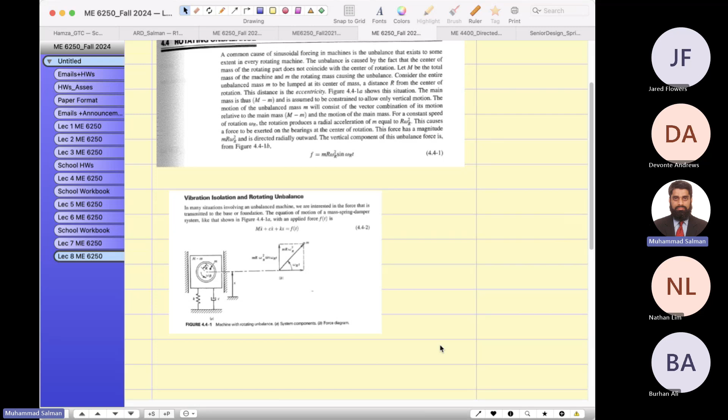So today we are going to cover the last topic of this chapter: vibration isolation and rotating unbalance. There is a very good example in our household, like a laundry machine or washer.

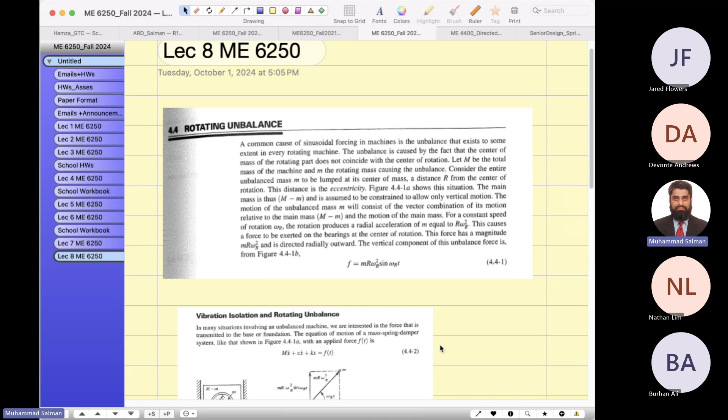So you see a drum. If I share with you, so what happens? You see, it's just like the washer here, which has a mass m.

So the mass of the washer is big M, and the mass of the rotating drum is small m. This mass has a radius we call the eccentricity. So the distance r from the center of rotation to the unbalanced mass is known as eccentricity, represented by the letter R.

And omega R is the constant rotation of that drum, or the rotating mass inside the machine. So when this mass rotates, the machine starts moving up and down, or vibrating with the rotation.

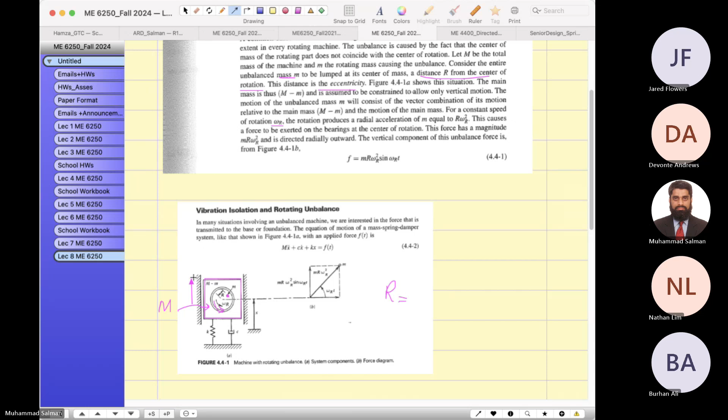And as you know, there's force transmissibility, the force due to this mass. Do you remember force equals mass times acceleration? Everybody knows this equation, correct? So what is the centripetal acceleration?

If there is a rotating mass, omega sub r, this is r. Centripetal acceleration is also known as v squared over r, where v is the tangential speed, which can be written in terms of omega as big R omega. V equals big R omega.

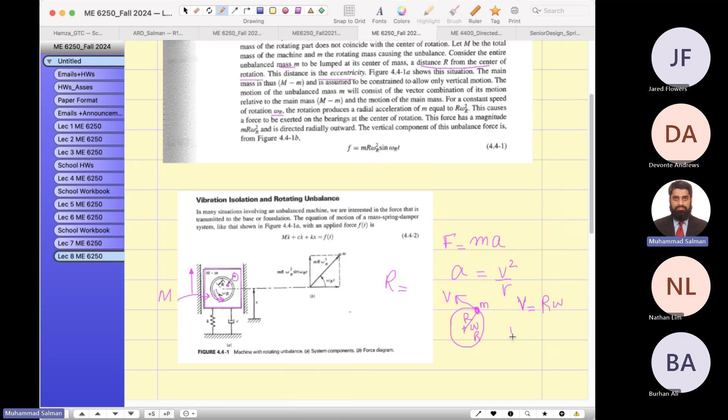And if you take the square of this, you get R squared omega squared, and you can plug it in — I'll just put this as big R. So the normal or centripetal acceleration is v squared over r, which is R squared omega squared divided by R. Now we know the force due to this unbalanced mass can be written as mass times acceleration, giving mR omega squared.

So this is the unbalanced force. Let me grab this one — the force transmitted to the foundation can be written as this equation.

When this machine moves, the mass moves like a washer, and the machine starts vibrating with a degree of freedom x, and this vibration also starts moving the foundation with a certain amplitude. I'm concerned more about the force transmitted through the spring, which is k times x. So this is the transmitted force to the foundation due to the rotating unbalance.

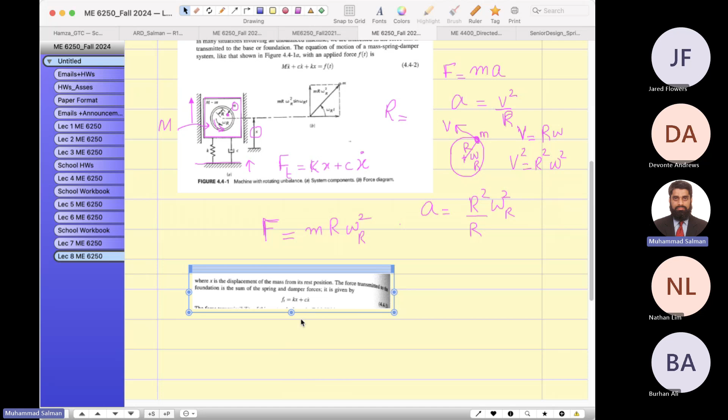Some people notice that if you have a washer on the second floor, when the machine completes the last cycle of laundry, it vibrates very fast, and that vibration can be felt in the floor. If you feel that, it's going to the foundation — how much of that vibration is transmitted from the rotating mass?

So this is Ft over F, also known as T sub F, where Ft is the transmitted force to the foundation. And what is that formula equal to?

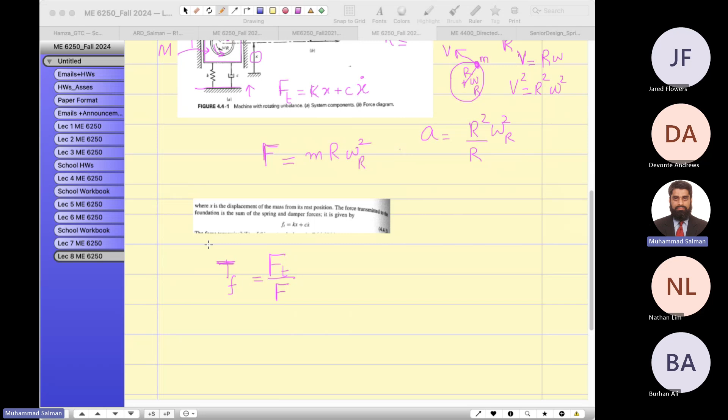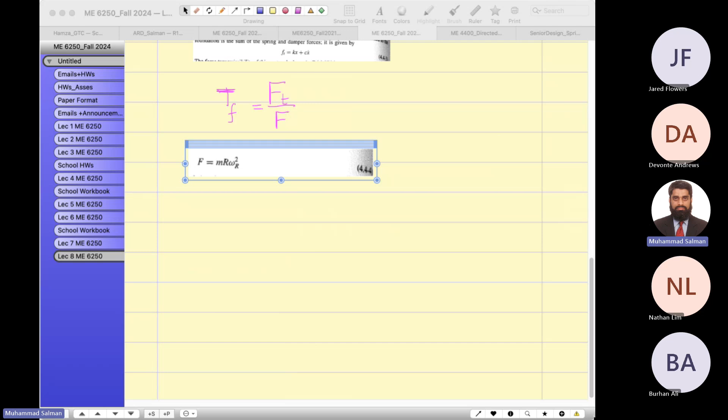Let me show you this equation here — this is the unbalanced force. And then if I do the derivation, which involves a bit of math, I will show you the final result because the derivation requires a lot of time.

We have derived this transmissibility, x over f, which can be written like this, then plugged in terms of the frequency domain. I want to cut short this derivation and go straight to the formula, so let me write down the final formula for this equation.

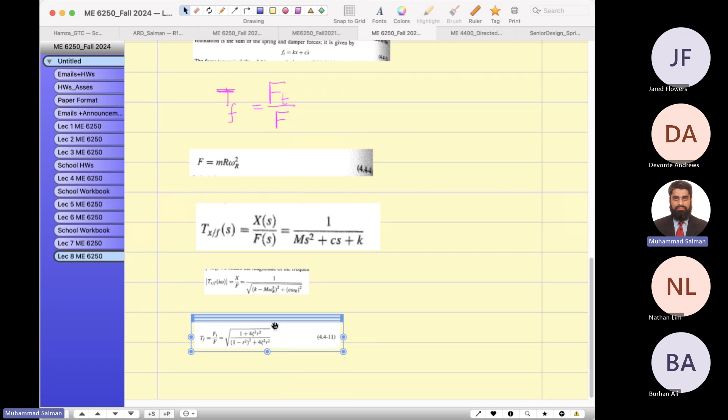Yes, this is known as transmissibility — I'm going to show you force transmissibility first. The transmitted force to the foundation can be found using this formula, where R equals the speed frequency over the resonance frequency, and zeta, as everybody knows, equals the ratio of actual damping to critical damping.

And sometimes you write critical damping as 2 times the square root of mk, or 2m omega n — these are the same thing. So this is the formula which you need for solving.

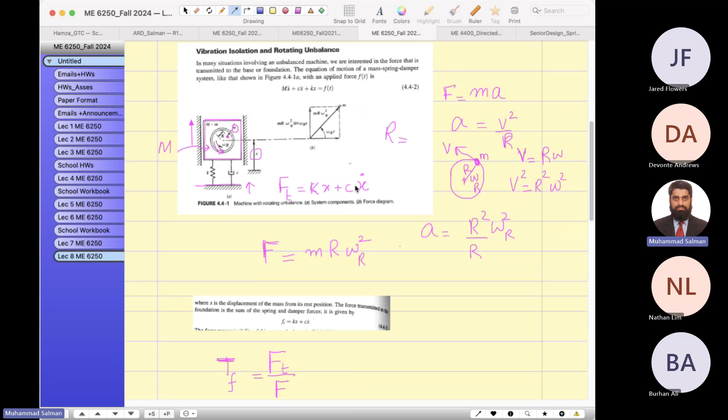And what is the transmitted force? We already know this transmitted force, and I can find it in terms of force, so let me write down the final answer. If you cross-multiply this force, the force due to the unbalance, over to the right-hand side, this is the unbalanced force, mr omega squared, which we started the lecture from. So this is the unbalanced force.

Now this is the formula for the transmissibility of force — please write it down in your notes. I'm going to solve some examples to help you understand the concept.

Now the next formula which I want to share with you is what we call the displacement transmissibility. I will say this is the displacement over the transmitted force. Let me show you this formula here.

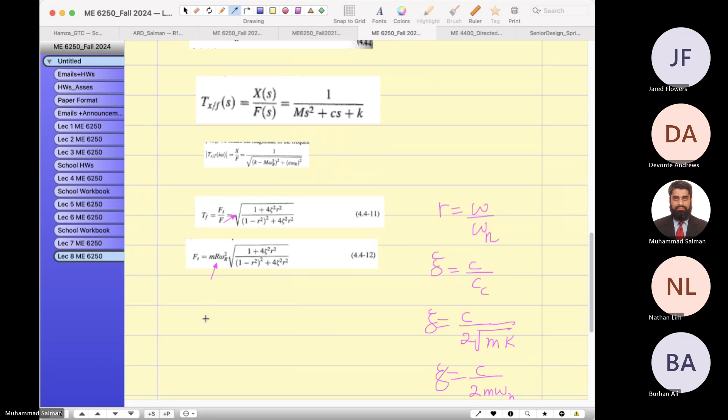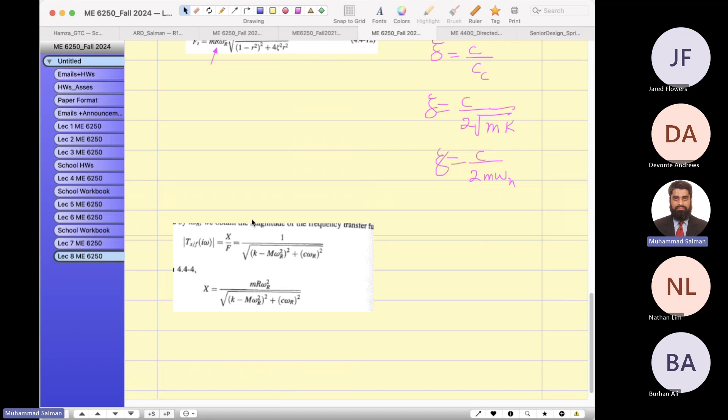This is the amplitude of the foundation. So amplitude can be found using the same formula from here. Let me grab this one here, and then I can put this over here. So these are the two formulae.

So let us solve one problem, 4.23.

Again, about your quiz: do you want me to open it tonight at midnight, or early morning like 7 a.m. till midnight? What do you suggest? It's no problem for me. 7 a.m. to midnight is fine. Okay, tomorrow it will be open at 7 a.m. till midnight, so that you have plenty of time. Some people go to work because master's students are not like undergraduates, they have some work, so I want to accommodate them.

So let us solve this problem. A certain motor is started, and it is noticed that its supporting frame begins to resonate at the motor speed.

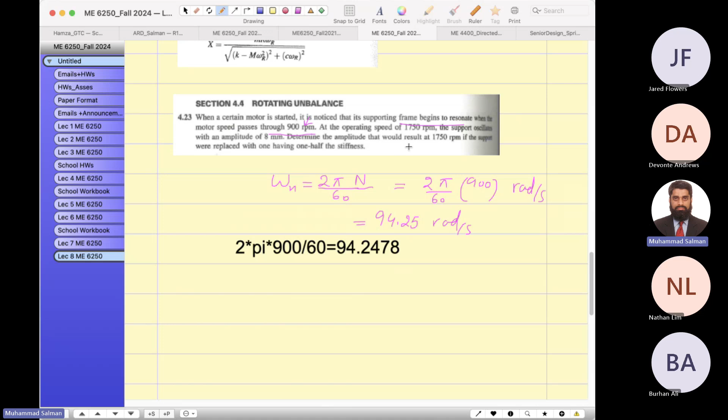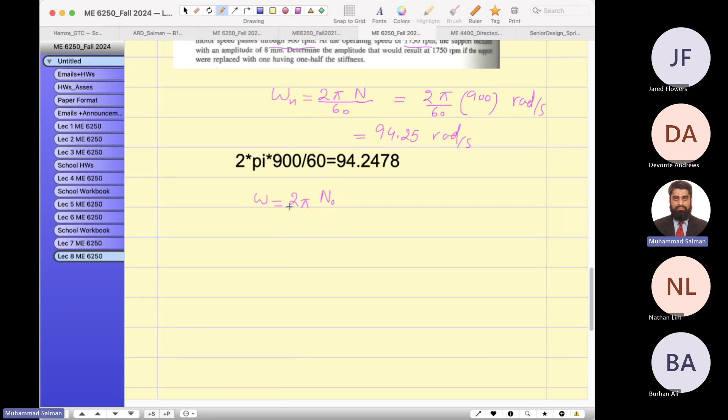At the operating speed, this is the omega which is the operating speed of the rotating machine, correct? So omega can be written as 2 pi times operating speed, N naught, over 60, which is 1750.

Can you help your professor? What is the R value here now? If I do the math, since 2 pi over 60 is constant, I can write 1750 divided by 900, and if you do the math, it's about 1.95. Let's write it down here, 1.95.

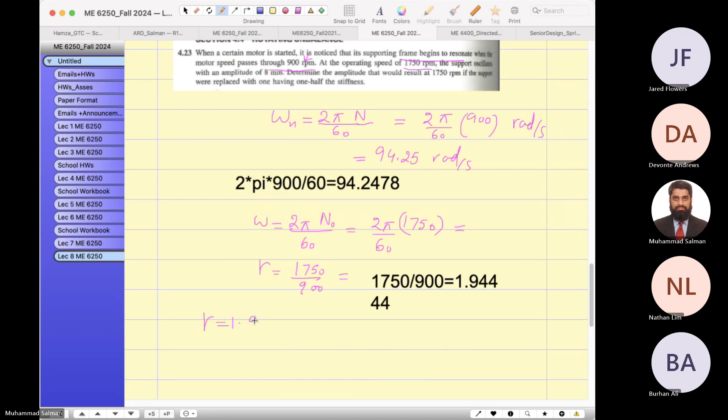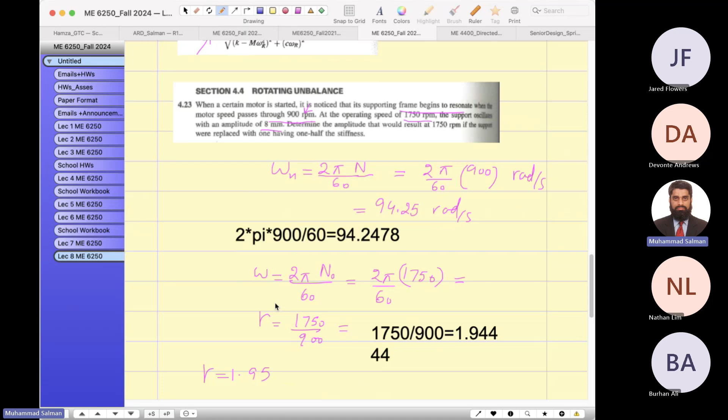Now it says the support oscillates with an amplitude. So you see the amplitude is given: the amplitude of the support is 8 millimeters, or I can convert it into meters. Agreed?

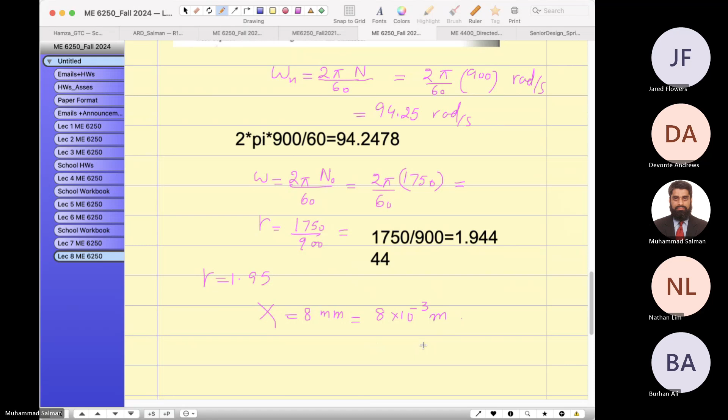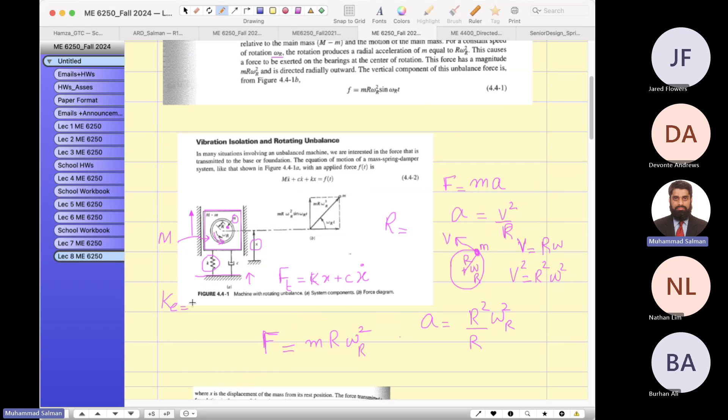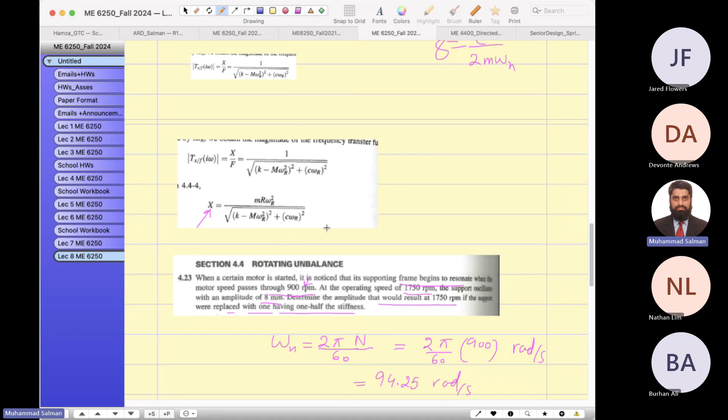And determine the amplitude that would result at 1750 RPM if the support were replaced with one having one half the stiffness. So the question is, if you replace this spring with K over 2, there is no damper in it. In this specific case, it has not mentioned any zeta value, neither C value, so there is no damper involved. So in this case, the zeta would be 0.

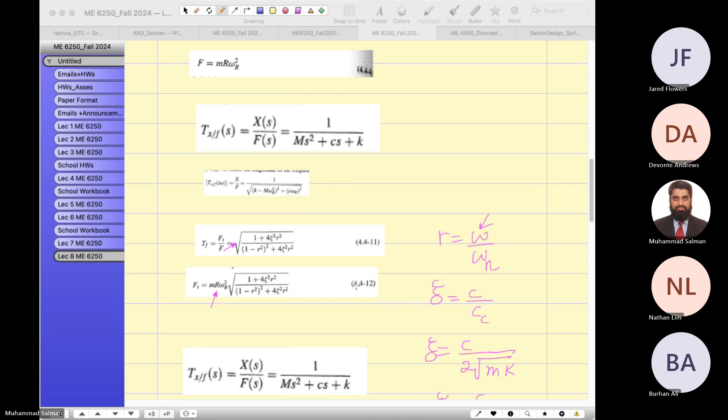Let me grab the formula sheet for you to solve this question. This is table 4.4-1 for rotating unbalance. So we need this formula.

So x equals to... plus 0, because there is no damper involved in it. So can I write down the new formula here: mr over big M, r squared, in terms of mod, because this can be positive or negative, since squaring converts every negative to positive, so I wanted to keep this in terms of mod. So what the question asks: this new spring is 1/2, keeping the same RPM. What is the new amplitude?

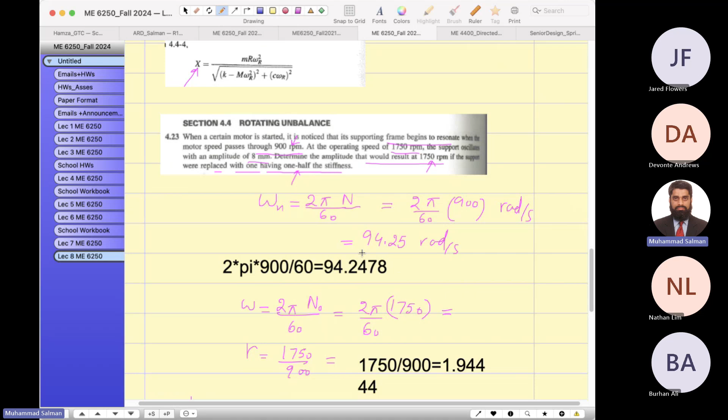So if you replace the spring with a smaller stiffness, what will be the new displacement to the foundation? So x you have to find out when replaced. What will happen? Omega n equals square root of k over m. So k equivalent equals k over 2. So what will happen to r? R is n rotating divided by n natural frequency, which is 17.

One second, what is this? We already found this R value here, 1.94, correct? But let me show you.

If you have k over 2 inside this, R equals omega over omega n. If you have omega over omega n, k over... I would not say it's just 2, k by 2m. This square root 2 will go in the numerator.

So I'm going to write down here, new R would be square root 2 times the old R. When you replace the stiffness of the spring with a softer spring, then the new R will be written like square root 2 R. So if you plug in this equation, the new R over here.

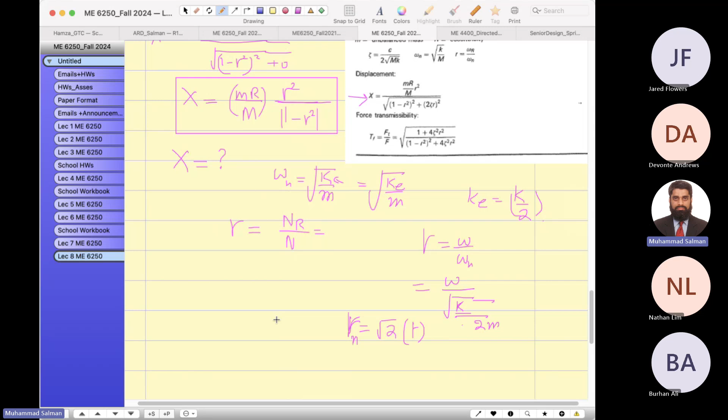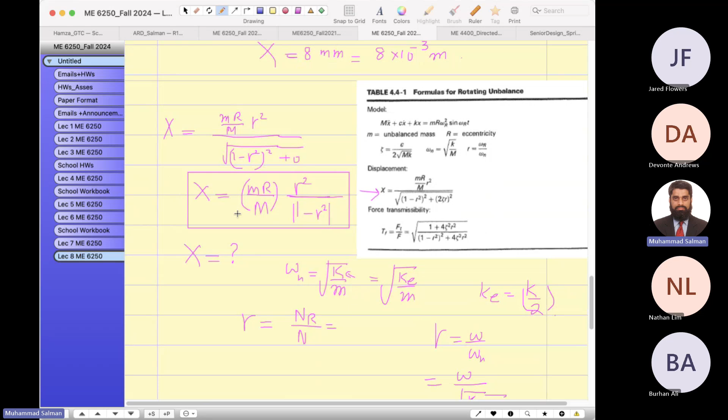This thing is not given directly. If you see in the question, they don't talk about the mass of the rotating unbalance, the mass of the machine, or the eccentricity. But if I keep this as a scalar value, like one variable, this ratio will not change, okay, or you can change it.

So if you find this variable, call it a, what is a in terms of from this formula? If you find a equal to x times 1 minus r square over r square, agreed?

So let's plug it in, let me write it down here. So what is my a? A equals 8 into 10 to the negative 3, 1 minus 1.94 square divided by 1.94 square. If you solve for this, do you get this answer? This is my A. A is nothing but we have assumed that this scalar value is equal to A.

So let me check it in my computer. 8 negative 3 times 1 minus 1.94 square.

Since it's a mod, you have to take the positive value. So if you place this, 1, 2, 3, so you get... we will assume positive value is taken. So now let's plug it in.

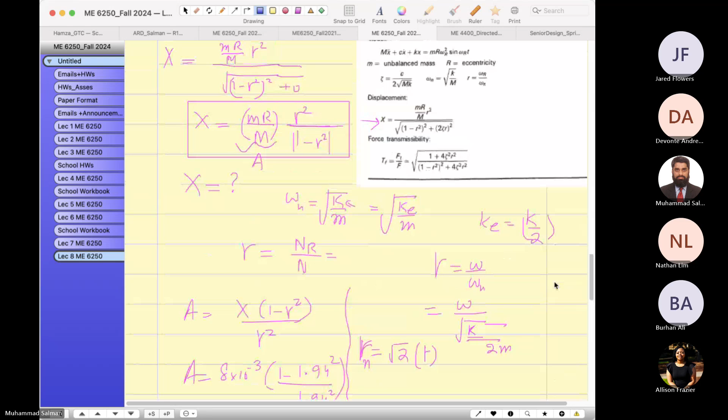So when R value increases, then the amplitude of the foundation decreases. So we have proved it. When you go home, do this problem again, okay? I will upload this video lecture for your help. Any question?

Let's do another problem.

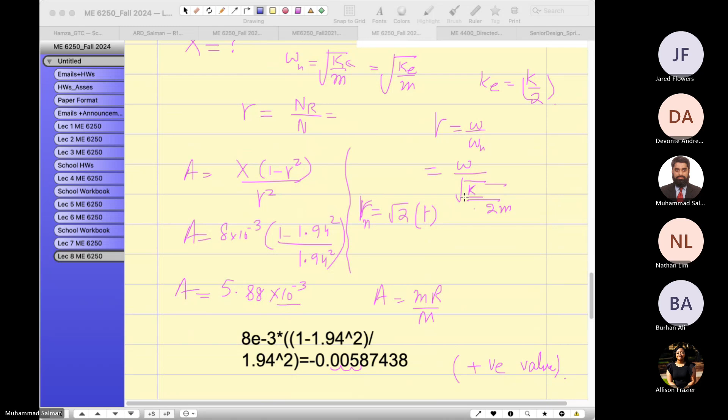I think this problem you can solve, this is similar to the previous one. I want to skip this one for your preparation, but you will do this at home. Let's do the next one.

The next one is different, a little bit different. It's still unbalanced, these are the problems from the unbalanced section. One of the students pointed out that I did not cover this, so I thought I should cover it.

A certain pump has a mass, so the mass of the pump is the big M, correct? And has a rotating unbalance. The unbalanced weighs... so the small w, I would say is just write down W U, which is 0.2 newtons. This is a little blurry, but this is 0.2 newtons. This is the unbalanced weight, not the mass.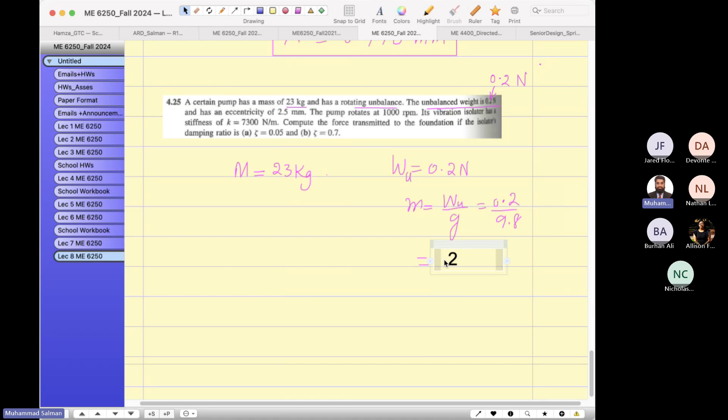Can you find out M? Yes you can: 0.2 divided by 9.8. Let's find it out right now so that we can use it in our problem. It is 0.0204. So this is in kilograms, okay, this is in kilograms.

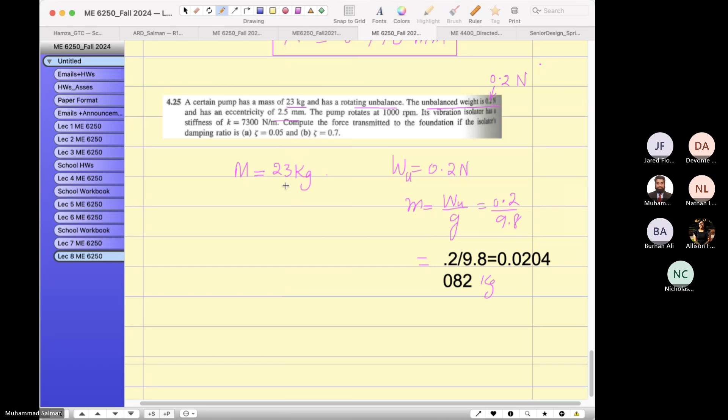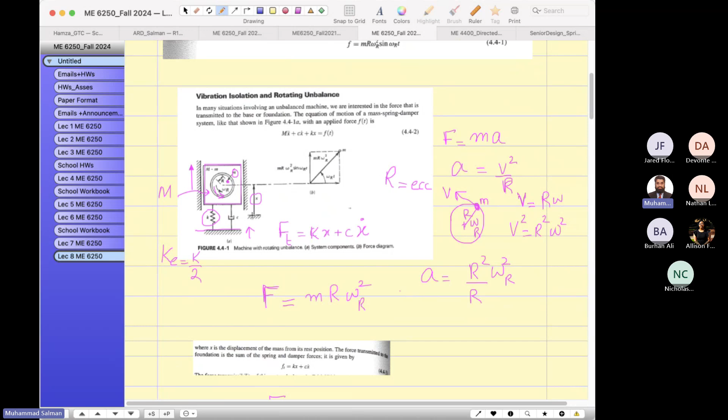The eccentricity, if you go back to the picture, is given as the distance from the center axis of rotation to the mass. So R is 2.5 millimeters, or 2.5 times 10 to the minus 3 meters, and the pump rotates at 1000 rpm. So the rotation speed is 1000 rpm. Its vibration isolator has a stiffness of 7300 Newton per meter.

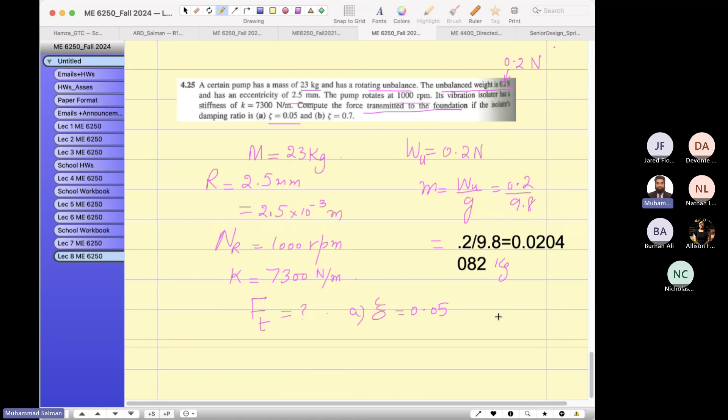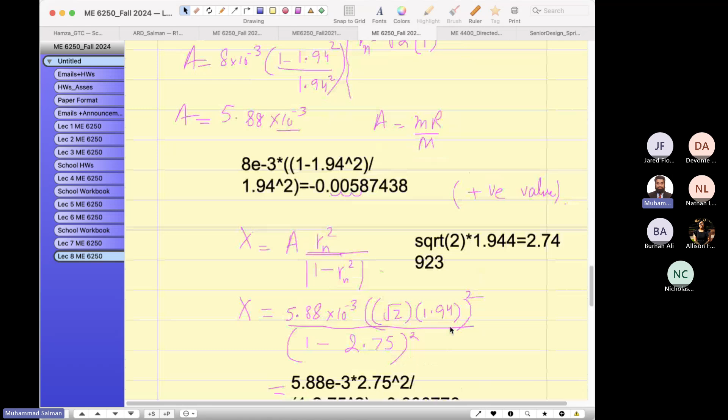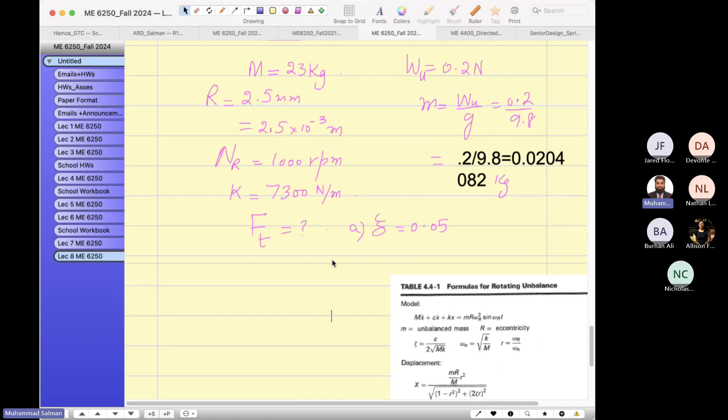Compute the force. Now it is the force transmissibility, so you have to find the transmitted force to the foundation. If the isolation damping zeta is 0.05, let's do that case, and the other case you will do at home. Let's find out the formula. Let's go to the formula sheet. I suggest you keep your formula sheet handy when taking the exam so you don't waste time finding the formula. So we need this formula.

So transmitted force transmissibility equals the transmitted force divided by F, where F equals M R omega squared. Now that is equal to...

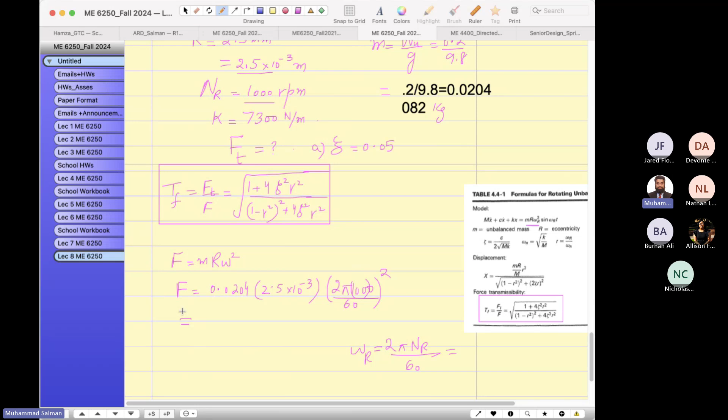Can you find out what F equals? F equals 0.0204, R equals 2.5. Let me move up a bit to show you. R is 2.5, and let's find omega R. N R is 1000, so I can write down here. This is my omega squared. So if you do the math, do you get 0.558?

Let me verify. I got 0.559, 0.558 or 9, it's almost the same. So this is in Newtons.

Now this F has been found, which is over here. Let's plug it in, using this formula. So I can write F sub T equals 0.558. Let's plug in the values here: 1 plus 4 times zeta, for A, zeta is 0.05, squared. What is R? We have not found it yet, but we can find it now.

R is equal to the ratio of the rotating frequency to the resonance frequency. And resonance frequency can be found using square root of k over m. Do we have the stiffness? Yes, we have the stiffness value 7300 and the mass of the pump is 23.

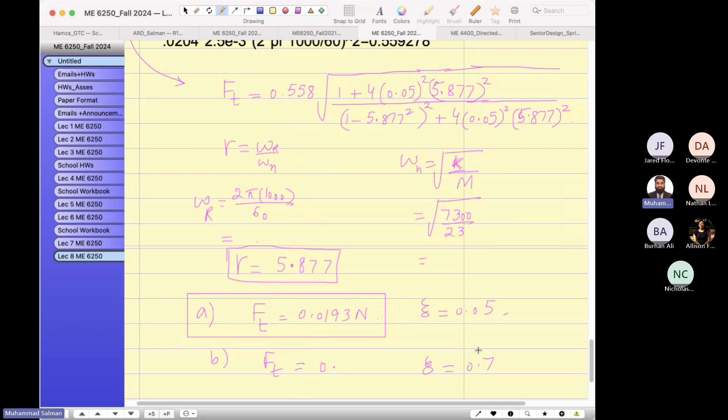Similarly, I haven't solved for B, but you can solve it at home. The transmitted force would be a little bit bigger when zeta value is 0.7. This is for zeta 0.05, this is for zeta equals 0.7. The force transmitted is a little bit greater because, you know, the damper - if it is a heavy damper, and the transmitted force formula is kx plus c x dot, the larger the damping coefficient, the larger the transmitted force. That makes sense, correct?

So with that, I have covered most of the problems. I suggest you go over this section as well as all the problems from 1 to 30. Try to see the lecture notes for more focus on the lecture problems and remaining homework problems. You can see similar problems, but I don't suggest keeping the solution in front of you - you can open the book to see the formula.

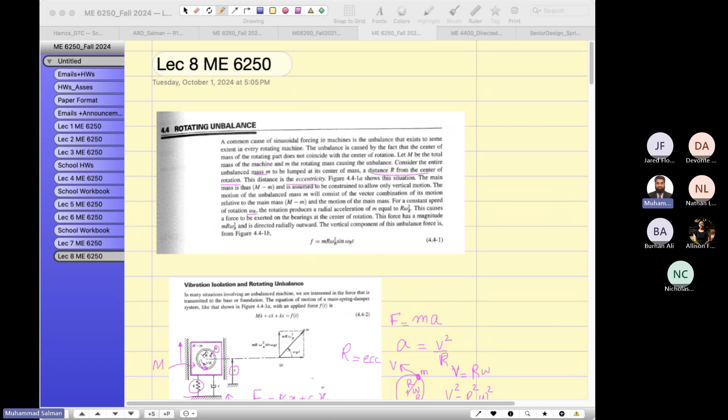So let's go to the next chapter. The next chapter is more about the Laplace transformation. I've shared with you the notes for the Laplace transformation, so let me share with you. I'm going to cover this from another book - it's about how to find the forced response. I uploaded these notes, so can you find these notes on your D2L?

The Laplace transform - let me make sure you have these notes available. If you go to the contents list, let me make myself a student to see in contents, syllabus, chapters, and then Laplace chapter 5. I have made quite a lot of videos - most of the problems I have solved, but they are on a different server, like the university's own YouTube channel. They don't call it YouTube, they call it media space. So initially I made the lectures for the media space.

For example, let's look at this problem. Can you guys see my screen? Oh no, they cannot see. Let me share with them the whole screen.

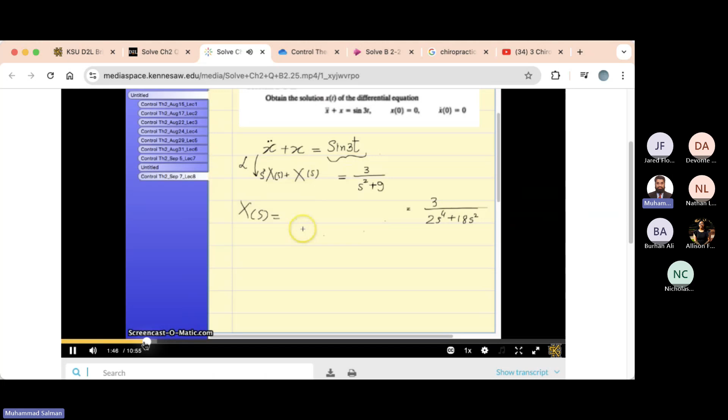Question 25, the last question of this. You should think about the physics, the mass, and the right hand side, and on the left. I don't want to completely run the video, I just wanted to show you how many videos I have made. I think for each problem I made some video. This is chapter 2, so I think it's good.

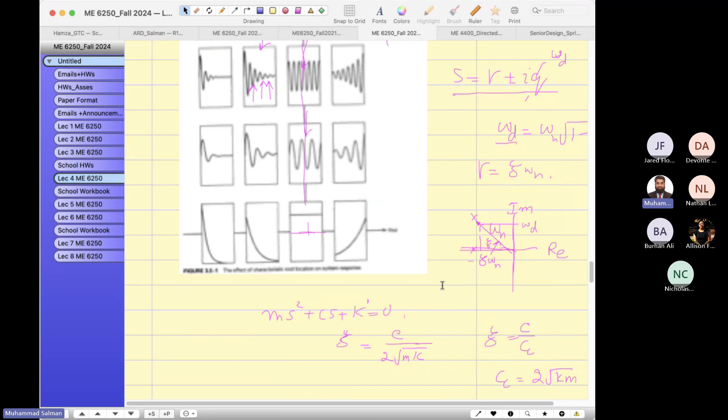From time domain to the frequency domain, and Laplace is like a frequency domain. Why am I saying that? You know you have taken this lecture, I believe lecture 4. You see, this is the Laplace domain, it's very blurry, but let me show you this picture. It's telling you that this is the imaginary axis, and this is the real axis. And if this is a complex root, S1 is located here.

If you have studied that the poles on the right hand side are the roots of the characteristic equation, and if these roots R are positive, then the response will be unbalanced. The system will not come back to the mean position.

But every system, if the poles are located on the left hand side, every mass system, they come back to the mean position, maybe a new mean position. Imagine this is the mass and the damper. If you just pull it, like 2 centimeters initial condition, and leave it there, it will come back to zero after some oscillations.

So the main thing is, if you know the Laplace transform, you can find the inverse Laplace transform to find out the displacement behavior - is it an unbalanced system, like growing? This would be unstable. This is e to the positive value.

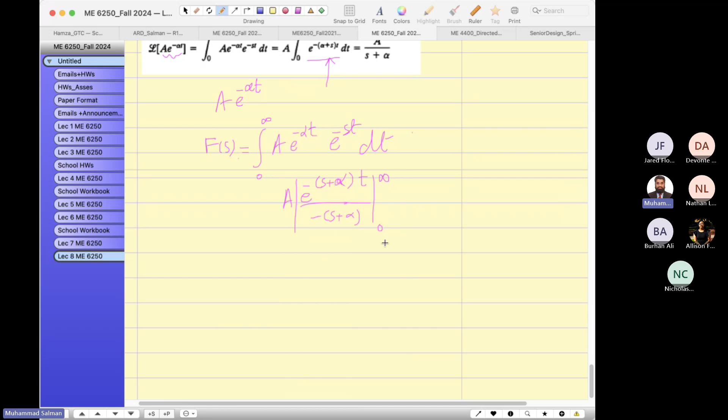So if you plug in the upper limit in place of t, e to the negative, let me bring it as plus alpha here, minus e to the 0. e to the negative infinity is 1 over infinity, which is 0. So 0 minus e to the 0 - anything to exponent 0 is 1. So it is 1, and this negative sign is multiplied by this. So you are left with the Laplace: the new function is a over s plus alpha.

So you see, if you want to take the Laplace transform of this function, a e to the negative alpha t.

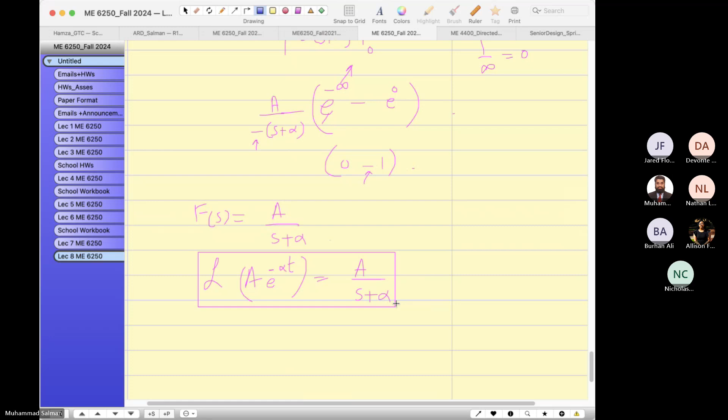Suppose if you want to find out the Laplace transform of a step function, you would see the answer is a over s. But how will you prove it? Let me show you. This is our definition of the Laplace transform.

So if I want to find this, suppose this is f of s, I can write a e to the negative st dt from 0 to infinity. What is the integral of this? A is outside, e to the negative st divided by negative s, upper limit infinity, lower limit 0. A over negative s is outside the parenthesis: e to the negative infinity minus e to the 0. This is 0, this is 1, so 0 minus 1 gives you a over s. This is the same answer we got before.

So I have shown you the basic method of how to go from the time domain to the Laplace domain.

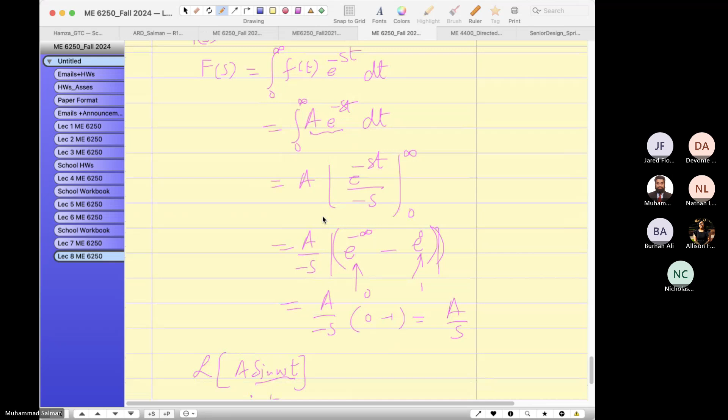Why am I showing you this? Because it is very convenient to convert it into the exponent function, because when you have f of t in terms of an exponent function like e to the omega plus whatever, you do the integration easily rather than using sine omega t. So how would you eliminate cosine from here? You just take the negative here, correct? This cancels out, so you just rearrange and simplify the answer.

So you see on the right hand side is 2j sine omega t, and on the left hand side, e to the j omega t minus e to the negative j omega t. If you bring this 2j into the denominator, sine omega t can be written from Euler's theorem.

So now it is in the form of exponent. It is very convenient for us to use the formula, so let's use the formula here. Integral from 0 to infinity, let's use this 1 over 2j outside. And this is f of t e to the j omega t.

Sorry, I forgot to write down e to the negative s. This is the Laplace transform definition, correct? So then you can do the math here.

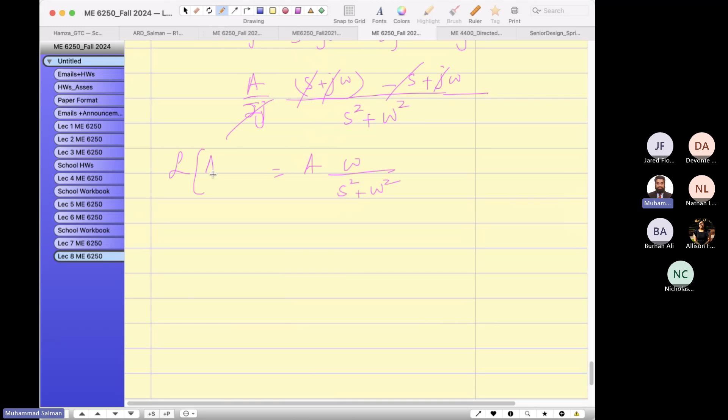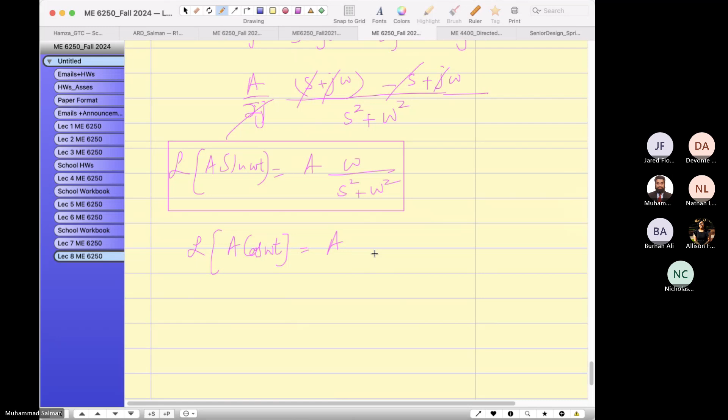So the Laplace transform of a sine omega t can be written in this form. And similarly, you can prove by yourself that the Laplace transform of a cosine, using the Euler theorem, when you go home you can use this one. Let me copy and paste it from the book chapter which I gave you.

Then some more theorem. By definition, you can translate the function or delay it by a certain time. So let me grab this picture here.

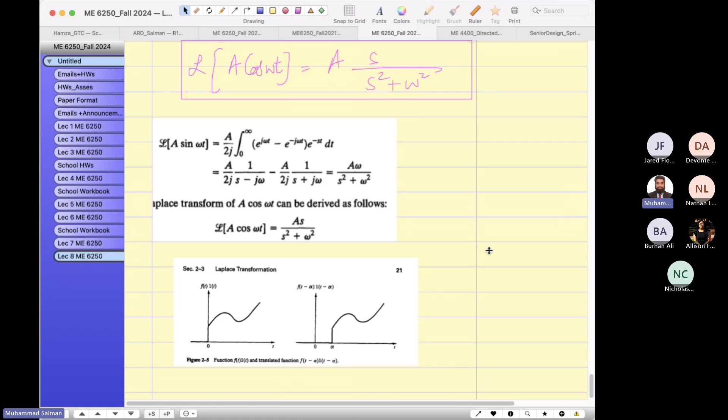So if you have such a case that the time domain function is starting from 0, but it is now shifted by alpha delay, this is like t minus alpha, meaning the function is delayed by alpha seconds, or microsecond, whatever the unit, it doesn't matter. So 1 of t minus alpha is telling us that it is delayed. But if it is starting right over here, so t minus 0, or 1 of t, means it is right at the origin.

So in that case, if you want to apply the Laplace property for the delayed function, you would do the math. I can show you here. This is the Laplace transform property for the delayed function, that you just multiply this e to the negative alpha s and F of s. Suppose, for example,

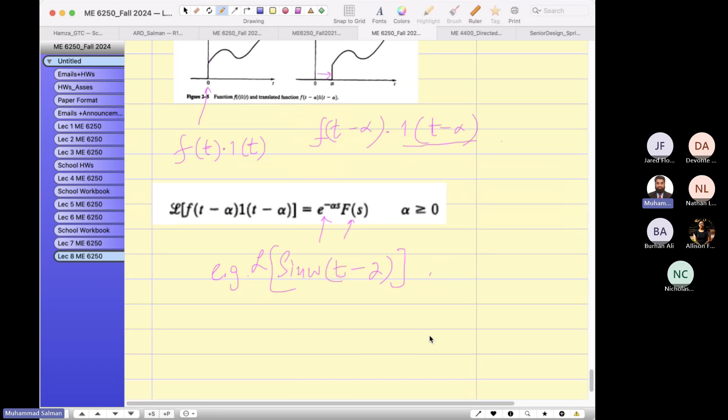you just have sine omega t minus 2. So what is the Laplace transform? You don't need to do every integration every time. You know that the Laplace transform of sine omega t equals omega over s square plus omega square, and then it is delayed. So you would write it down, e to the, how much delay it is, negative 2s.

Correct? And then let me rewrite here. This is S, correct? And then you will write down the Laplace transform of the sine function. This delay, you have to write it down according to the Laplace transform property of the translation.

Another thing I want to mention here, how do you take the Laplace transform of a pulse function and impulse function?

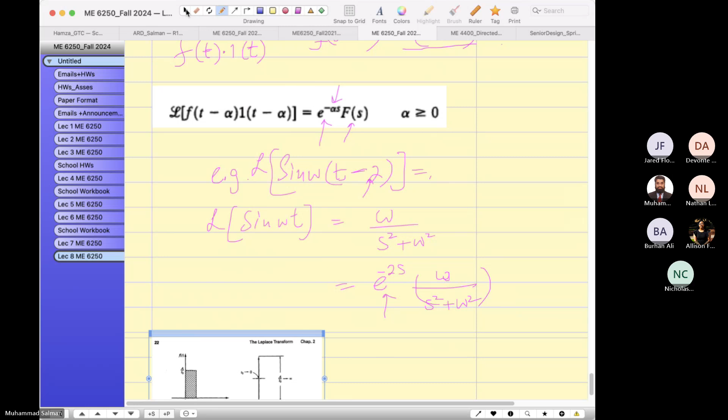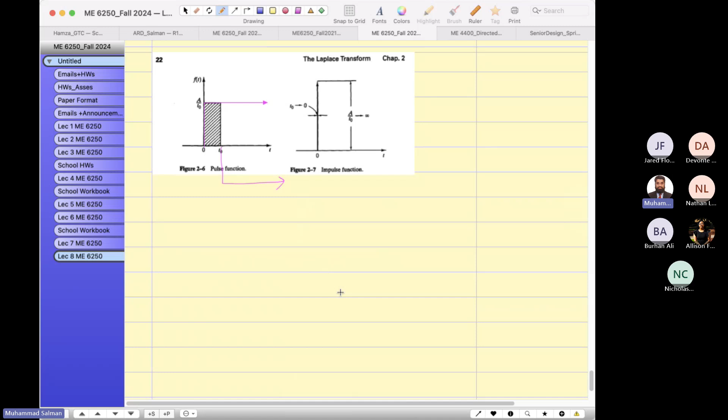So the way you can see that a pulse function, if you take a look, this is a unit step upward, and then over here it is unit step downward. If you add these two steps, you get a pulse function, correct? So what is the step value?

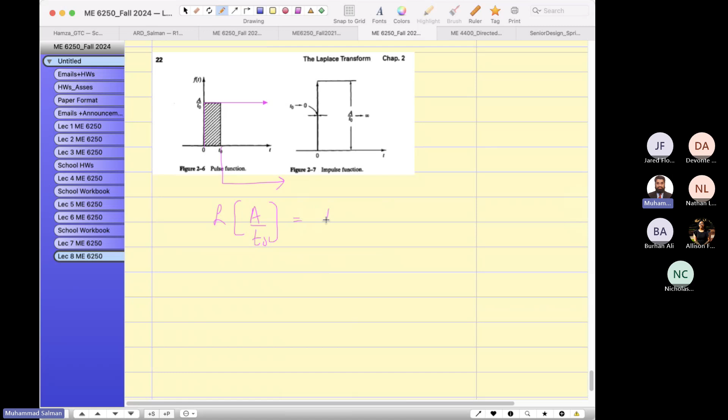What is the Laplace transform of the first, a over t0? You will tell me, Professor, this is a over t0, 1 over s. Agreed? This value is a little smaller, but this is given here. How about it has been delayed by t0?

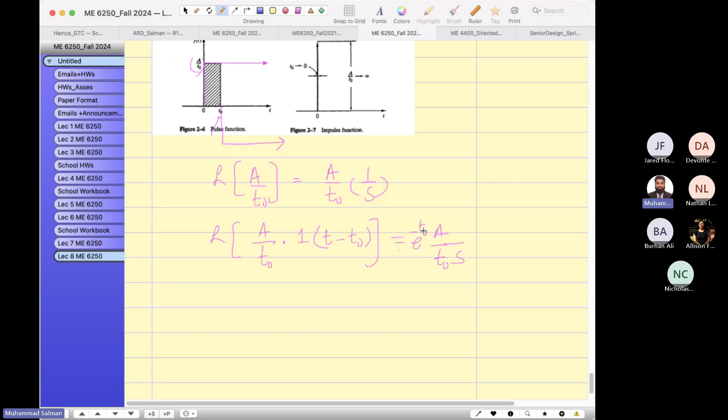So the Laplace transform of a over t0, which has been delayed by this function, you can write down as the Laplace transform a over t naught s and e to the negative t naught s.

Then when you add these two, oh sorry, this should be a negative sign because this is going down with a similar scalar value, correct? Negative, yes, negative. So if you have a negative sign here, if you take the sum, combine them, combine two Laplace transforms, combine 1 and 2.

Let me show you the final answer here.

So when you add these two functions together, these are two pieces of the unit step function, correct? So when you add them, you get this Laplace transform of the pulse function. We call this the pulse function.

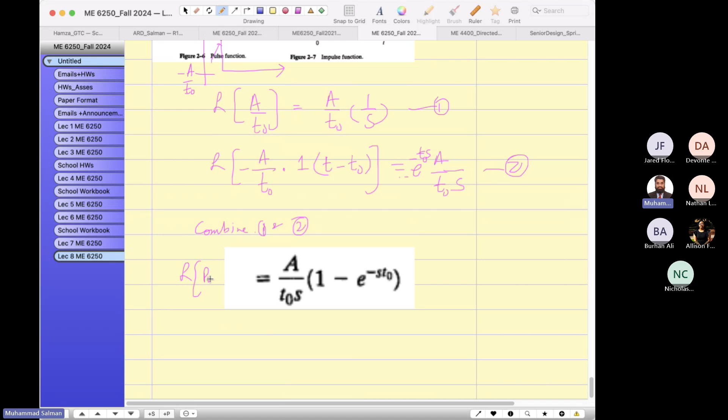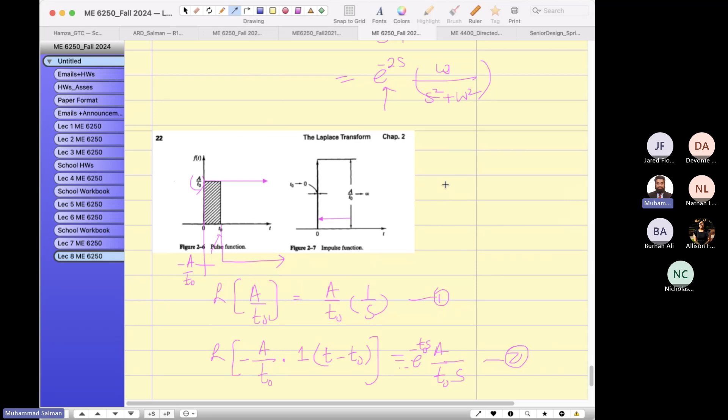So what if you want to reduce this t naught to 0? If you bring it closer to the origin, like an impulse, like if you hammer something, what is the time response? So if you make the limit t naught equal to 0...

So let's do this over here. If you want to take the limit of this function, then you will apply L'Hopital's rule.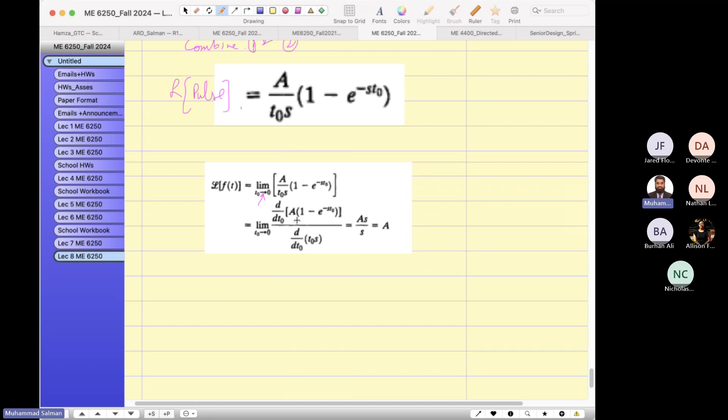Apply it to the pulse function, the same pulse function, but now t naught is going to approach 0. When you plug in 0, you get 0 in the numerator and 0 in the denominator, so you have to apply L'Hopital's rule, taking the time derivative in the numerator. For this one, you get negative s, t naught times negative s. This is s, sorry, not t naught, this is s.

So now you can apply this over here. This is correct, negative times negative becomes positive. So now you apply time t equals to 0 here, and now you can get this result.

The time derivative of this function is 0 minus e to the negative s. So this becomes 0, then divided by s, so then you have a in the numerator.

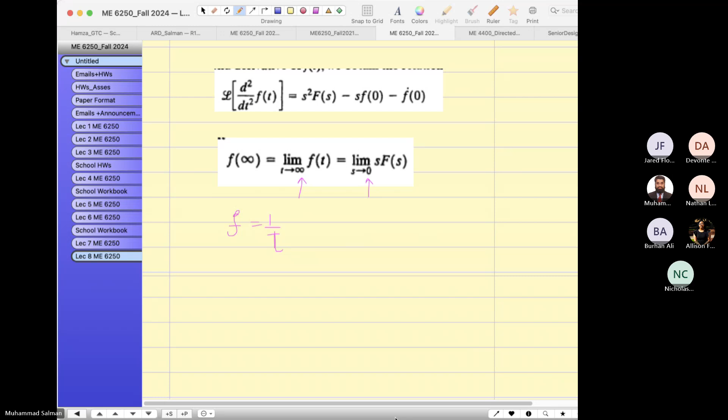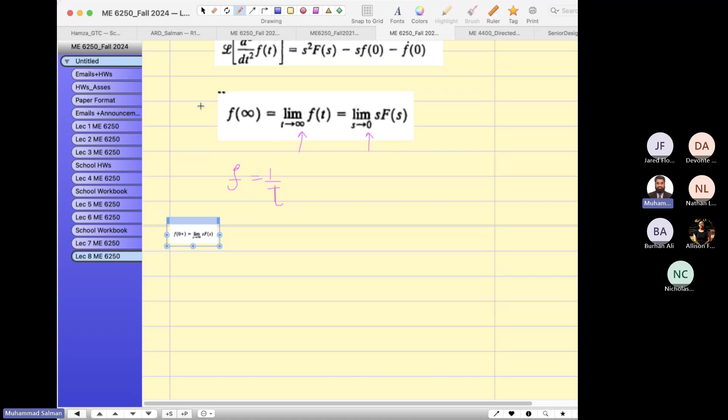But make sure you put f of s for that. And what is the initial value theorem? Instead of t equal to infinity, you plug in time t equals to 0. But when you plug in time t equals to 0, it's 0 plus, meaning coming from the right hand side, this becomes 0 plus, meaning coming from the right hand side of the function.

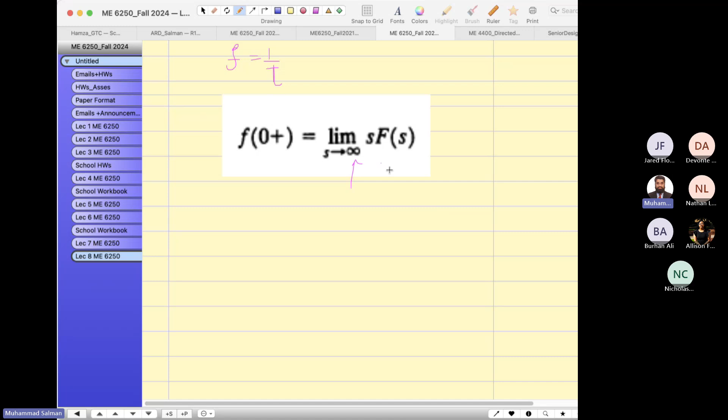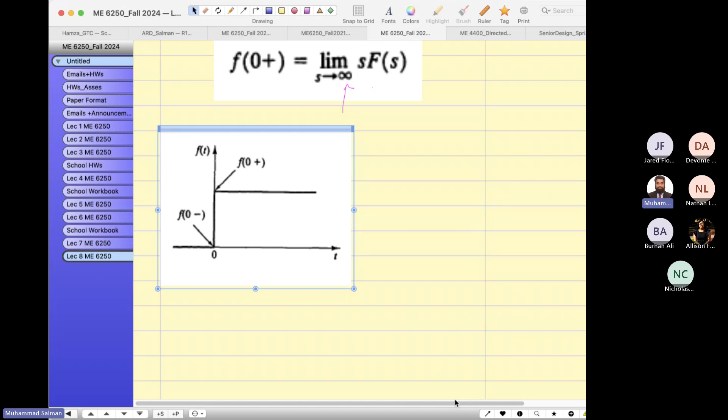Let me show you the difference here. 0 plus means coming from the right hand side to pick up the value at location 0, and if you're coming from the left hand side, it is 0 minus. You can see there is a sudden discontinuity, like a sudden rise.

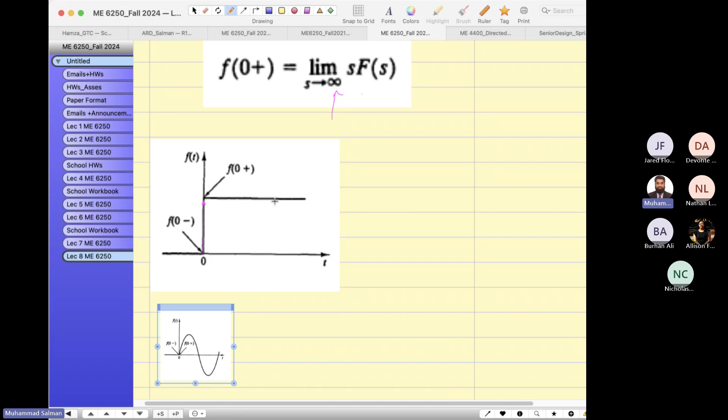For a step function there is a sudden rise here, but here if I take the sinusoidal function, there is no discontinuity. The f0 plus and f0 minus are meeting at a location, so you will see the same value here.